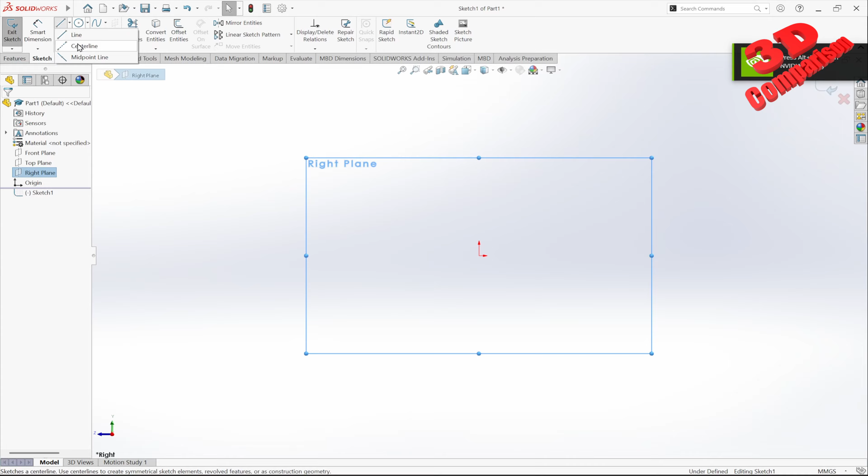I'm gonna start with something simple. Initially I'm just gonna make a profile over here, something like this, and I will make it on the other side, so symmetrically. I could have gone ahead and created this using mirror, but I will just set them like this. I want this to be equal, I want those also to be equal, and I want the two vertical elements to also be equal.

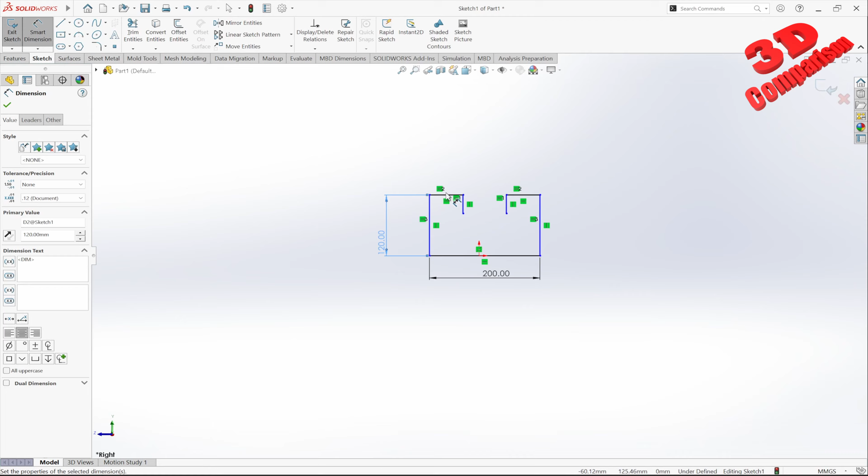Let's say maybe I want this to be 200 millimeters. We're gonna set everything to be rescaled, 120. I'm gonna make this 60, and in this case I'm gonna make this 20. I still need to center this, so I will select that edge, select origin, and make this midpoint. Now I'm gonna go within sheet metal.

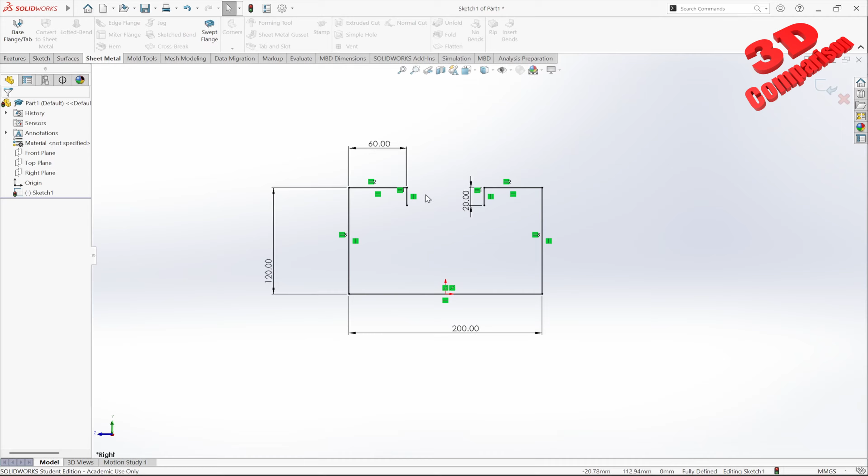If you don't have this workbench, you can activate it over here. Underneath tabs, you're gonna find it over here. And using this profile, I'm gonna go and define a base flange in this case.

Let's say that I want the thickness of the material to be 3 millimeters and the radius 3, and I want this to go 120 millimeters over here.

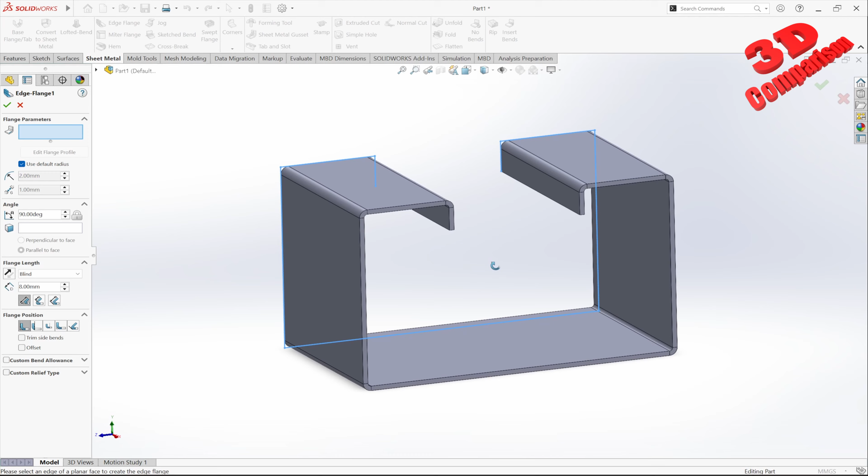Now this will be the profile, and now let's say that I want to close this side over here. I can do that using edge flange. I can select that I want to raise this edge, and I can specify that I want to go up to, for example, this vertex. This will automatically change the flange length to be up to vertex, as we can see it over here.

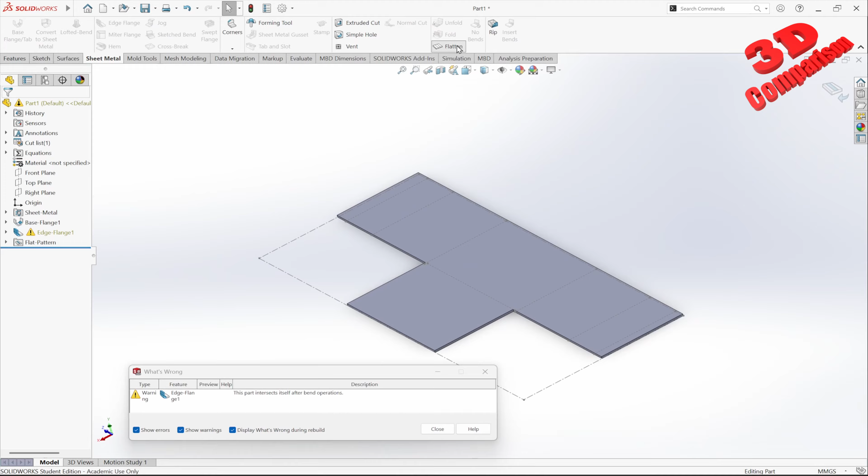Now it's important to define the flange position over here, because by default, if I'm just going to click OK, this will be set to material inside. If I click that, we're going to see that SolidWorks will actually give us a notification that this part will self-intersect after the bend operation. So we have the flattened part like this. After we bend it according to the 3D model over here, we're going to have this problem.

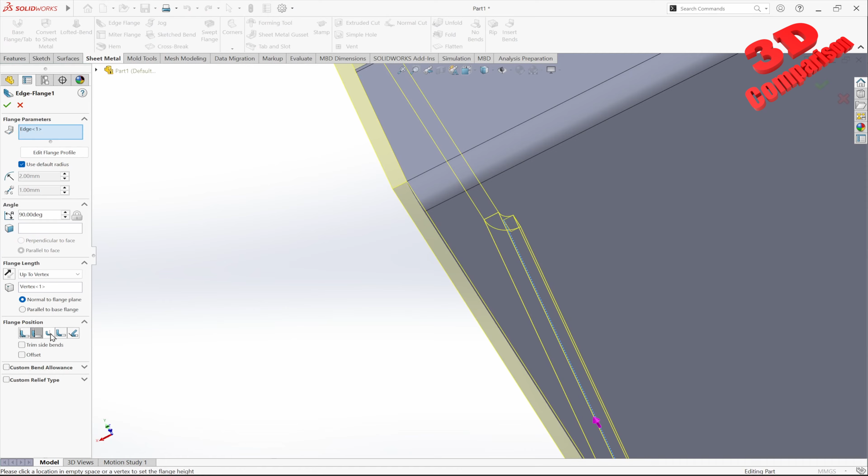So in order to deal with this, we have, for example, this position over here, which will be material outside. And this will give us another self-intersection, as we can see. But in this case, I can also go with the following one, which will be bend outside. And you're going to see this will actually take the material a bit outwards, and we're going to have the following result over here.

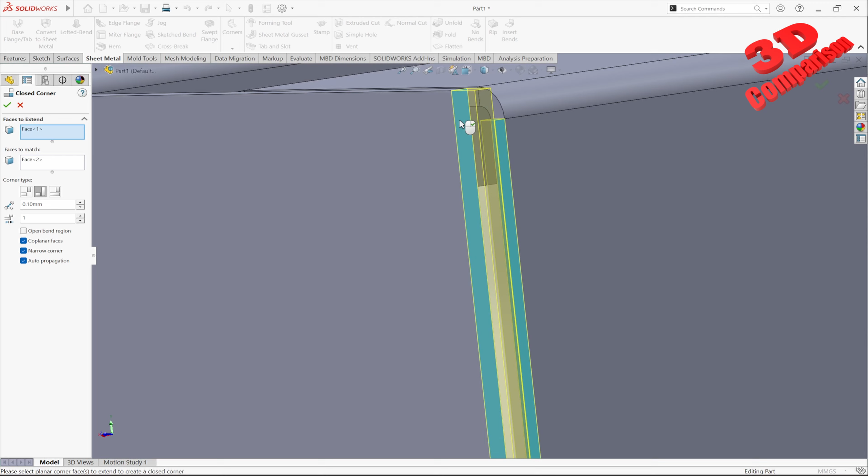Now, let's say that I want to close these sides over here a little bit better. We can do that underneath corners, we're going to have the closed corner feature. I can select one face onto one side, and SolidWorks will automatically try to find how to fix those, how to fill them.

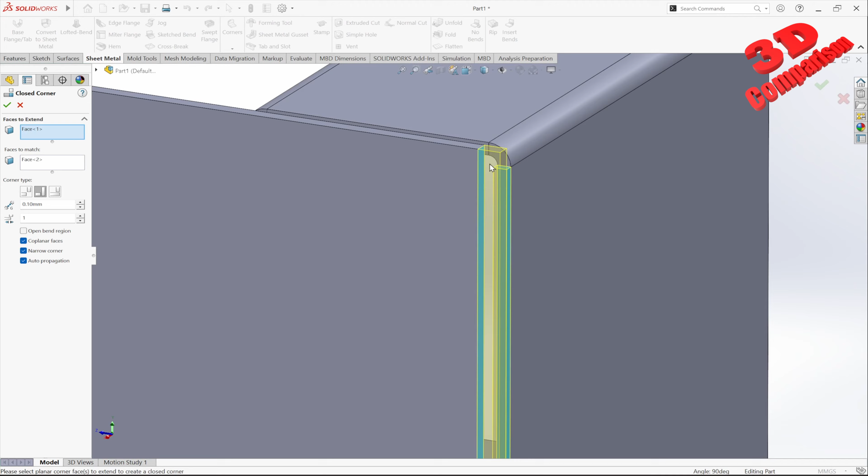In this case, I can go with overlap. We're also going to have this option over here, which is called butt - this will be the first one. And we're going to have also underlap. So we're going to see that underlap will extend that one, but in this case, if I'm going to go with the one in the middle, overlap, it will extend that one. So in this case, I'm going to go with that.

I can do the same onto the other side. So I can go over here, close corners, I can select those. We have over here a gap, so the gap is currently set to 0.10 millimeters. I can just hit OK, and now we're going to have that closed.

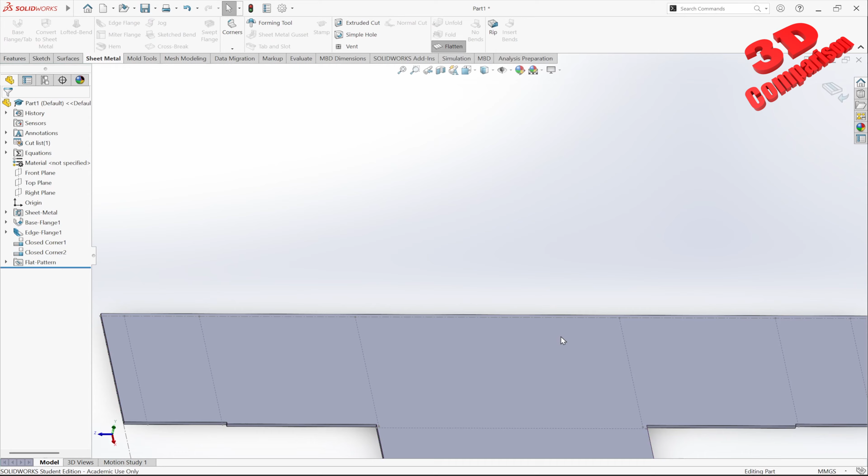If I'm going to flatten this, this will be the output, and we already see that we have that additional segment over here added. We can go ahead and measure that. Using evaluate, we're going to see that this will be a total of 1.9 millimeters. You could also go directly on the edge and SolidWorks will give you the length, similar to the measurement that I previously have done over here.

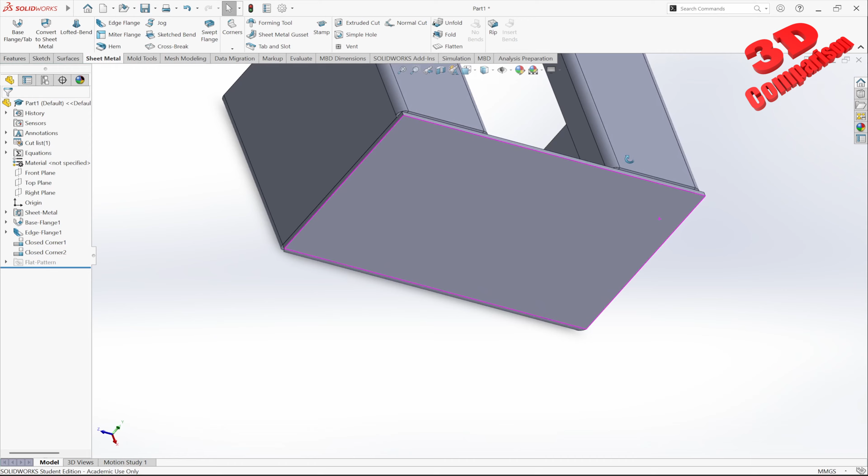Now let's say that I want this top part to be close to the one that we defined, so that we're going to have this a little bit better closed.

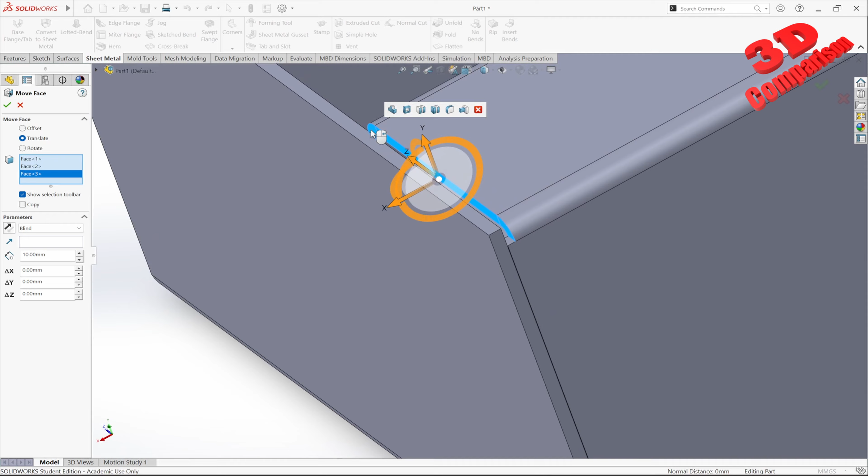In order to do that, we have the possibility to move that faces. So we're going to find over here with the insert, for faces, we're going to have move. With this selected, I'm going to select that face, the next one, and as you can see over here, a total of 4 faces I'm going to select. SolidWorks will give me various selections, as you saw over there.

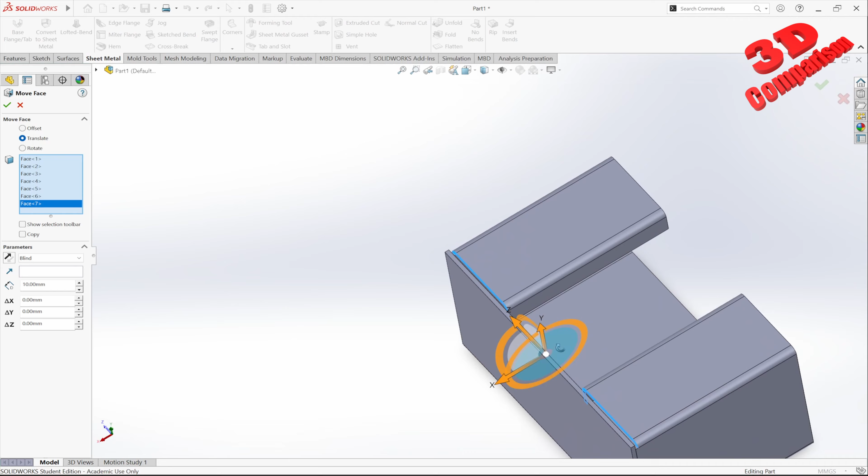If I'm going to select this as well, I'm going to see that it will try to auto-complete that for me. But in this case, it will not select as I want. So I only want those faces over here, I should have one additional on the middle, and I want them to be moved closer over here.

So I can go to translate, and over here we're going to see the direction will be X, and if I'm going to add over here 1.9 because we know that will be the distance, we're going to be up to that part. So if I'm going to hit OK, you're going to see it will look like this.

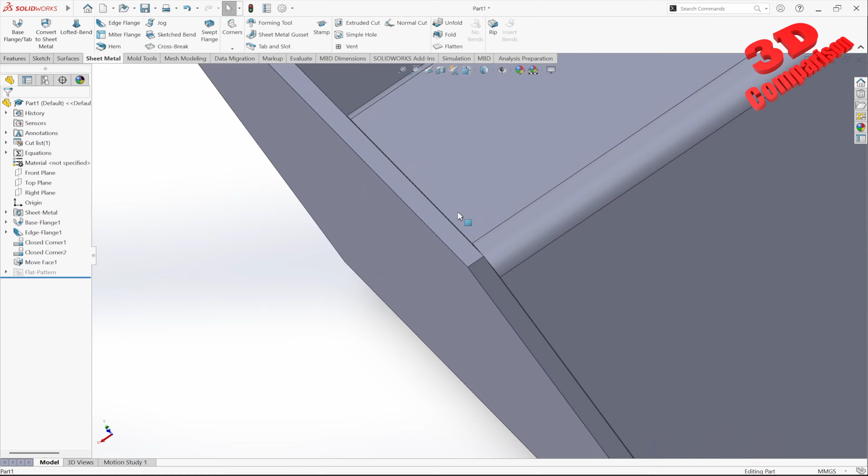Now if I'm going to flatten this, we're going to have the following flatten part. If you want, you can also leave a small gap over there, because now if I'm going to go within a section, within that region, we're going to see that we actually do have a small gap.

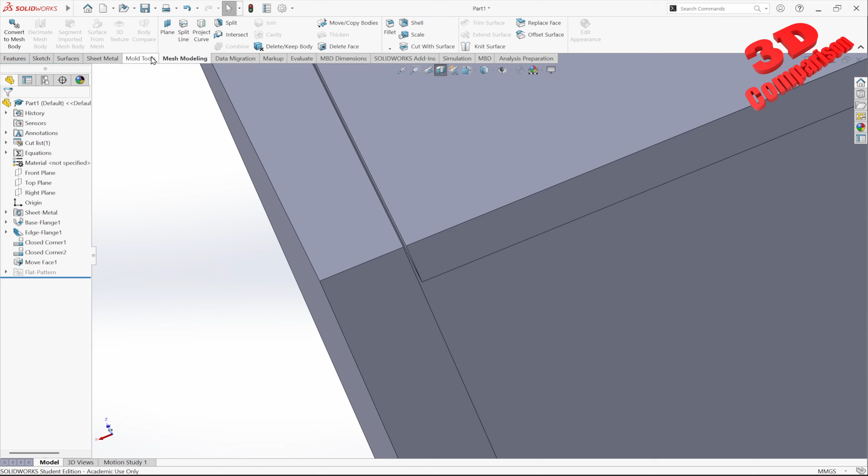So I can click OK over here, and if you're going to go ahead and measure that, within evaluate, I'm going to go for measure, and I want the distance between those two, and we're going to have the same 0.1 distance in this case that we also applied to the sides over here when we close that corner.

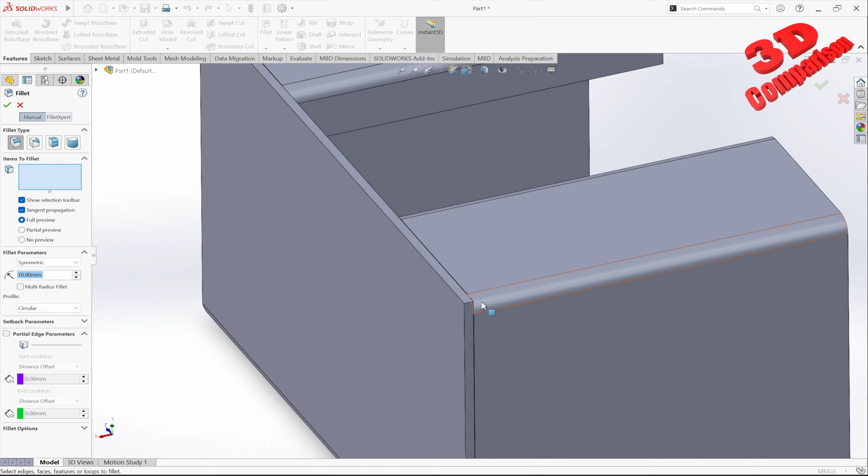Now, if you want to make this look a little bit better, you can also consider to add some fillets. So we can go over here within fillet. I know that that was in this case 3, and I can add that as well over here.

So we're going to see that with a radius of 3 it will look like this. In this case it was actually more than 3. So if I'm going to click like this with 4, we're going to have the following fillet.

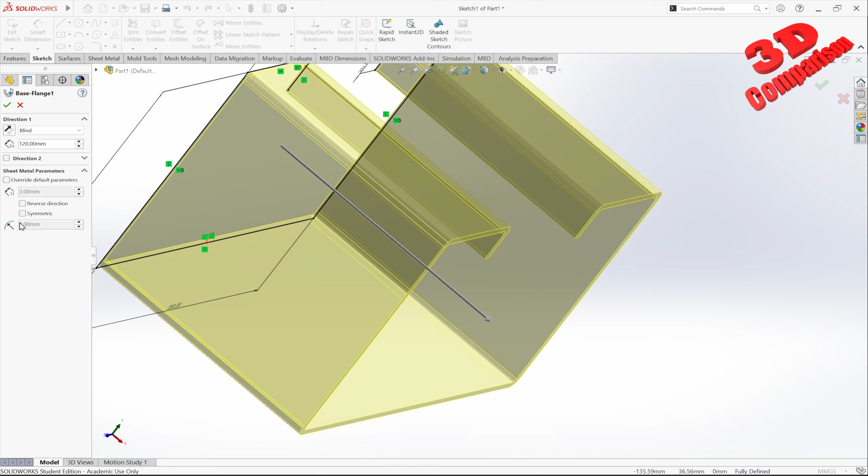If I'm going to go on the base flange, we're going to see over here that these were the default settings, as we can see them. So in this case, the bend radius was 2. That means over here for this fillet, we're going to have that radius. So with 2, it will be like this.

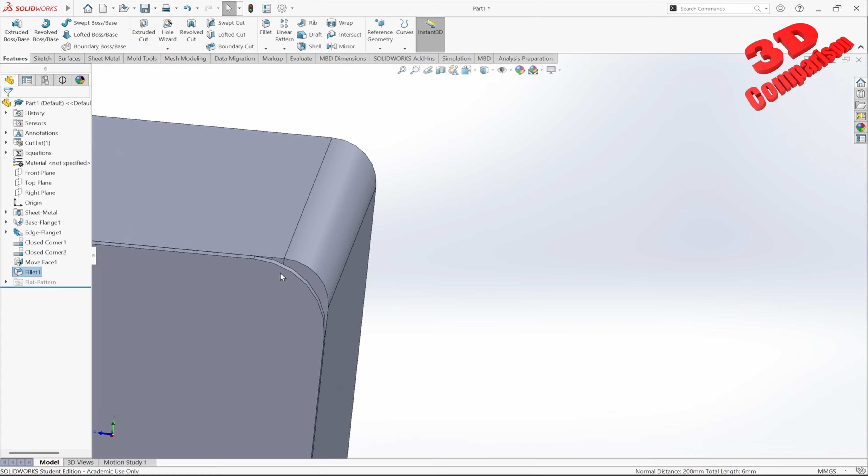If I'm going to go with 8, for example, we're going to see that it will be the following, so in this case a lot larger than the other one. But if I'm going to go with 4, in this case, it will be like this. Now, it's still not exactly the same. So as you can see, if I'm going to add 2 over here, it will be like this.

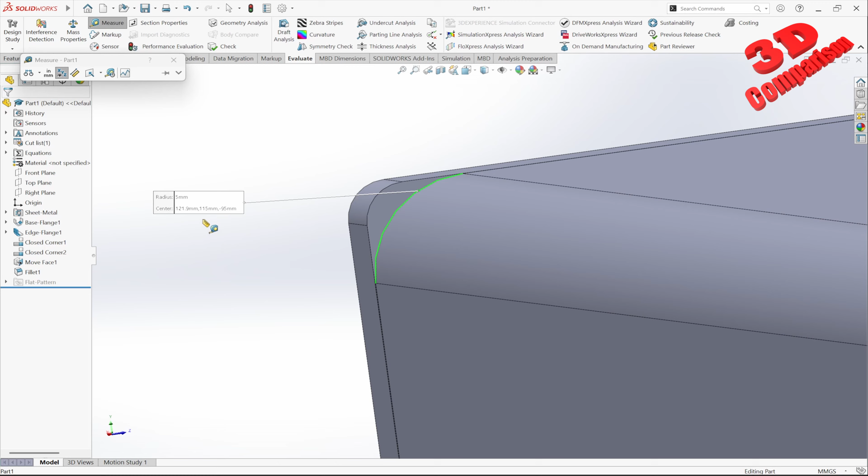So if I select this and go within evaluate and measure that, we're going to see that actually this radius over here will be 5. So in order to make our part similar over here, if I'm going to go directly with 5, this will be the output. And in this case, if I have this flatten, we're going to see that it will look as following. So this is the final result.

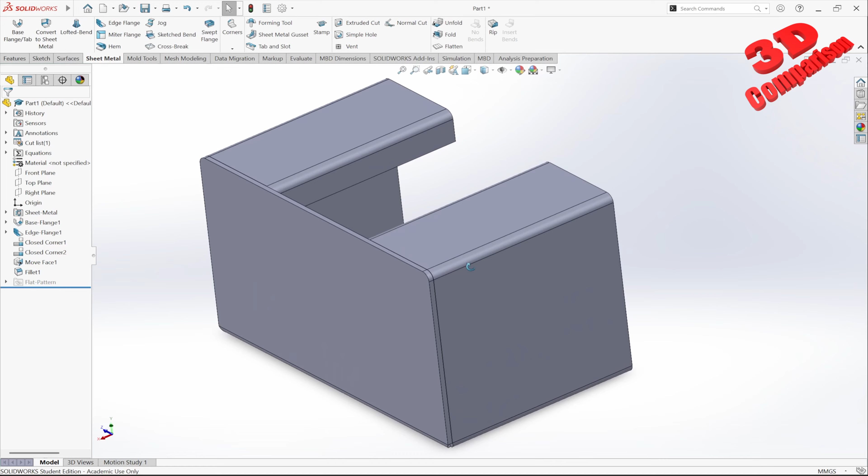And when we have all the bends applied to the part, we're going to reach this point where we're going to maintain that 0.1 gap over there and over here as well.